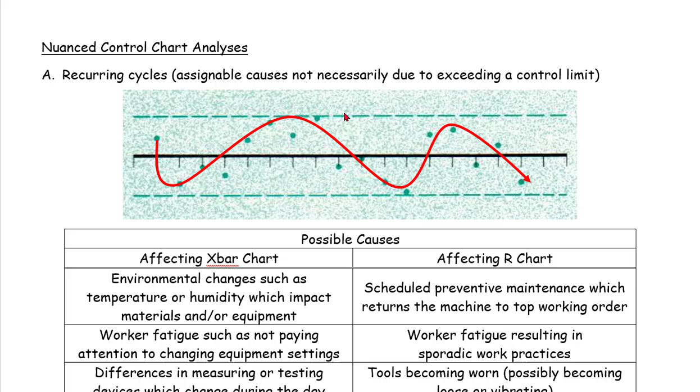So what could possibly cause this? If it's an X bar chart, you could have environmental changes such as temperature or humidity which impact materials and/or equipment. It could be worker fatigue such as not paying attention to changing equipment settings. It could be differences in measuring or testing devices which change during the day. Or it could even be routine rotation of machines or workers.

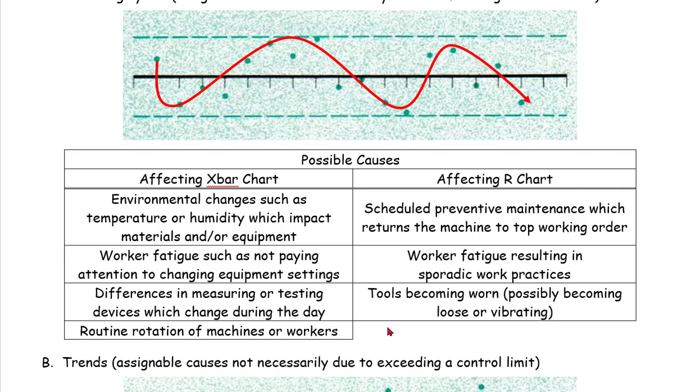If you have an R chart behaving this way, perhaps you have scheduled preventive maintenance which returns the machine to top working order, worker fatigue resulting in sporadic work practices, tools becoming worn, possibly becoming loose or vibrating. These are not necessarily the definitive causes, these are just some examples.

Another thing that we could look at would be trends. Assignable causes not necessarily due to exceeding a control limit. And you see here, these are exceeding it here, but generally you have this trend of things gravitating either up or down across your control chart. So possible causes for an X bar chart: gradual deterioration of equipment, worker fatigue, accumulation of waste products like oily sawdust on the machine work surface.

Things that could possibly affect if this was an R chart: improvement or deterioration of workers' skill operating the machine, worker fatigue, gradual change in quality of incoming material being used. Again, not guaranteed to be the causes, but potential causes.

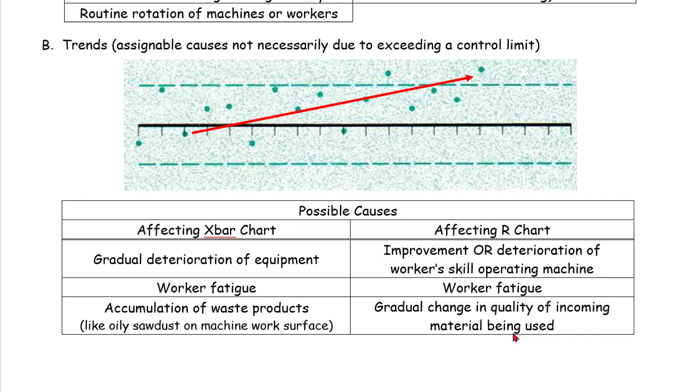Another one, jumps in process level, considerably more points either above or below the X bar line in this case, or the R one. If you look at this one, there are 11 points above the center line, the X bar, and only 6 below, which means there may be something that's allowing it to move towards the top.

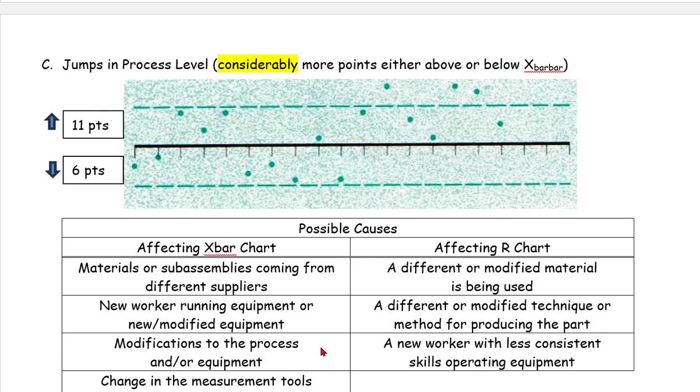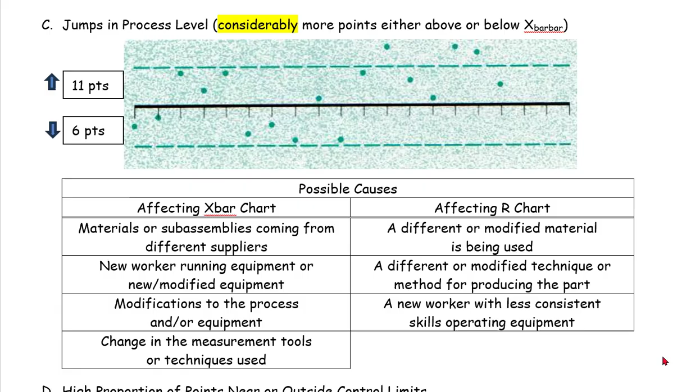So if you're looking at an X bar chart, materials or subassemblies coming from different suppliers could play a role in it. New worker running equipment or new modified equipment, modifications to the process and/or equipment, changes in the measurement tools or techniques used. If this was an R chart instead, a different or modified material is being used, a different or modified technique or method for producing the part, a new worker with less consistent skills operating the equipment.

Again, remember what I'm talking about in this segment are things that affect the control chart, but not things I'm going to be asking about on exam 2B. You could have a high proportion of points near or outside the control limits. You see all these points kind of gather here and they kind of gather here.

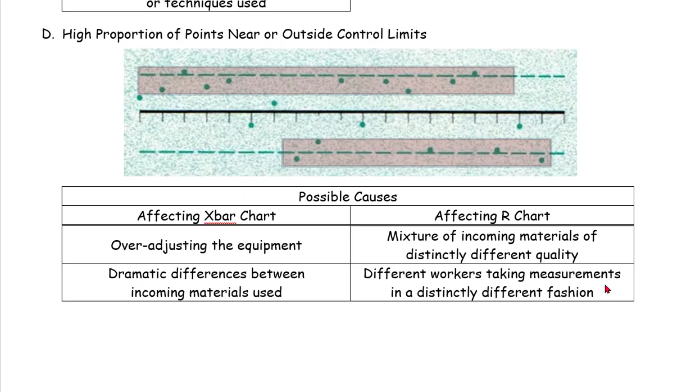What could be the reason for an X bar chart? Over adjusting the equipment. Oh, here's a problem, let's adjust it. Here's a problem, let's adjust it. Where they should have probably let it ride out a little bit. Dramatic differences between incoming materials used. If it's an R chart, you could have a mixture of incoming material of distinctly different quality or different workers taking measurements in a distinctly different fashion.

Just 2 examples. E, stratification or lack of variability. You see it's all clumped here in the middle. So possible causes for an X bar chart: incorrect calculation of your X bar control limits. You calculated these wrong, perhaps. Poor sample size resulting in R bar being artificially larger than is actually the case. How does that play into it? Because remember, the R bar plays into the calculation of the control limits for the X bar chart.

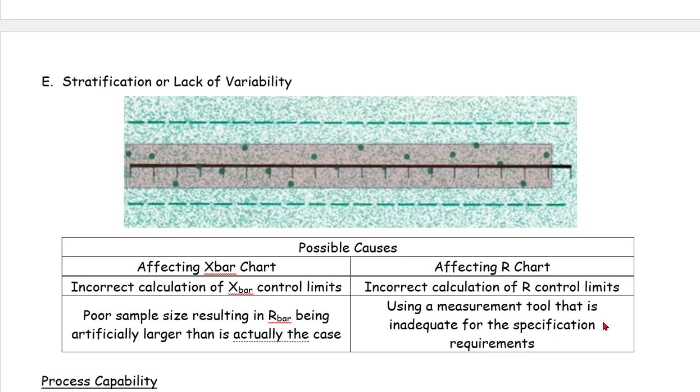If it's an R chart, you could have an incorrect calculation of your R control limits. You could be using a measurement tool that is inadequate for the specifications required. It's like using a ruler to measure to the thousandth of an inch. It's just not going to work out for you.